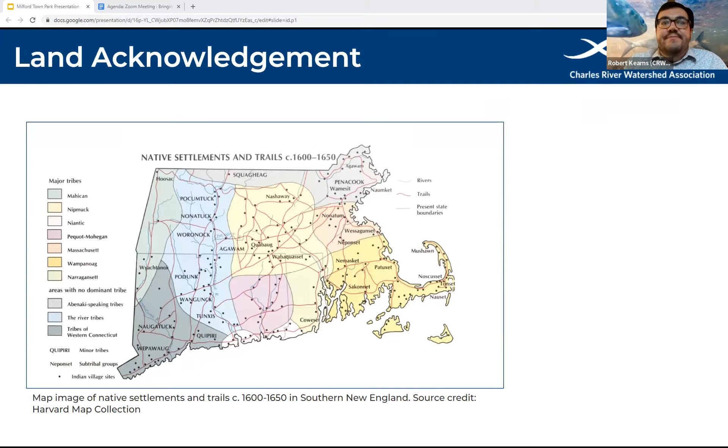Also, we're going to be seeing more dry periods - things will be flashy, then drier periods and droughts.

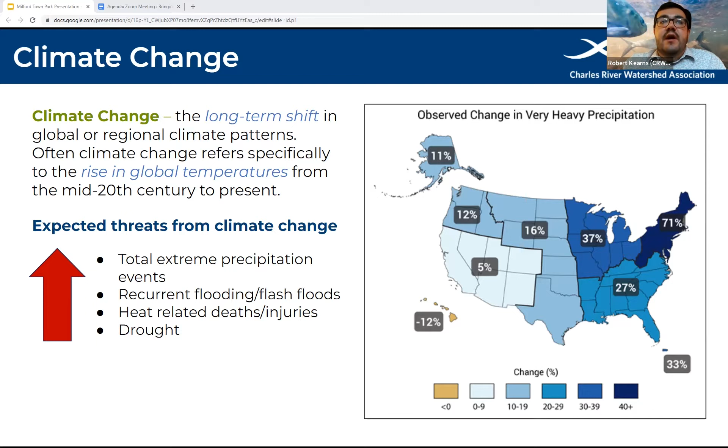When we think about climate change in our built environment, there are different areas in our watershed and communities where water acts differently. In undeveloped areas like forests, parks, and green spaces, we see more natural cycles in the water - more water able to get back into the ground and infiltrate, as well as get fed into the plants and trees.

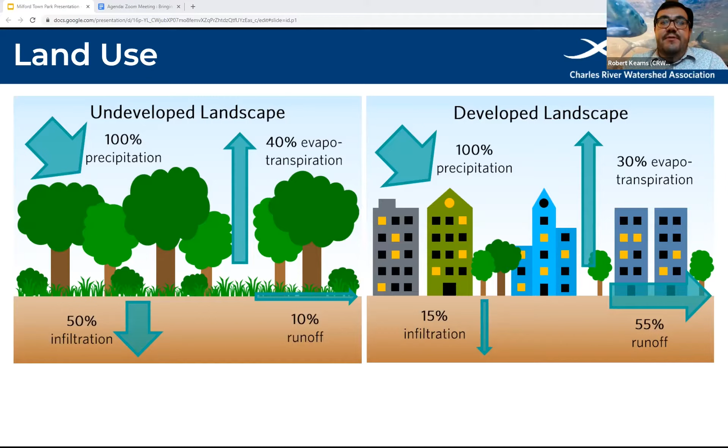In the developed landscape, we see a lot more runoff from impervious surfaces - your blacktop, your hard asphalt type surfaces. This creates a greater threat to our river and our communities from climate change, causing more flooding as well as more stormwater pollution, which I'll talk about in the next slide.

Also, with respect to development and redevelopment, we have opportunities to change conditions and improve water quality when we have the chance to do that work.

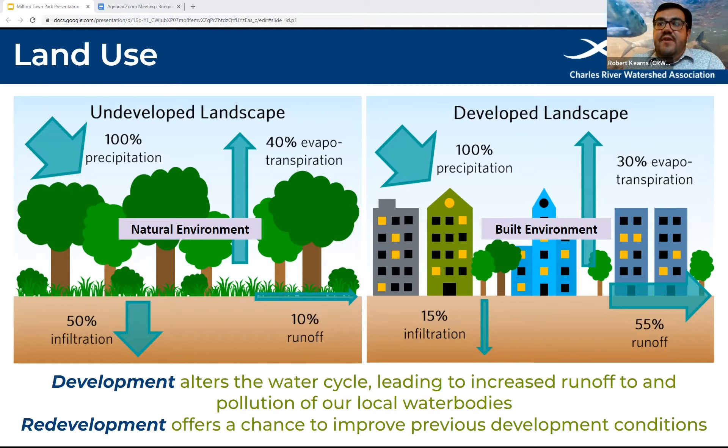When we think of stormwater runoff, anytime it rains, all of that water gets onto our roofs, sidewalks, and paved surfaces in our communities. All of the oil, all of the phosphorus that comes from fertilizers and from pollution in the air gets into our river through the drains in our streets, and impacts from leaves in the fall can also carry this stuff right into our river.

Oftentimes people think that the water going down the drains in the street gets treated like sewer water, but unfortunately it doesn't - it just goes directly into our water bodies.

Additionally, we're seeing the impacts on water quality in our river, specifically nutrient pollution from phosphorus and fertilizers, which is really impacting the water quality of the Charles River.

And when this stormwater gets into our water bodies, what we see is an abundance of cyanobacteria and other algal blooms. The cyanobacteria is one of the more concerning ones because it comes from all this excess nutrients, and it's really harmful to animals, plants, as well as humans if they get into contact with it a lot, especially small dogs.

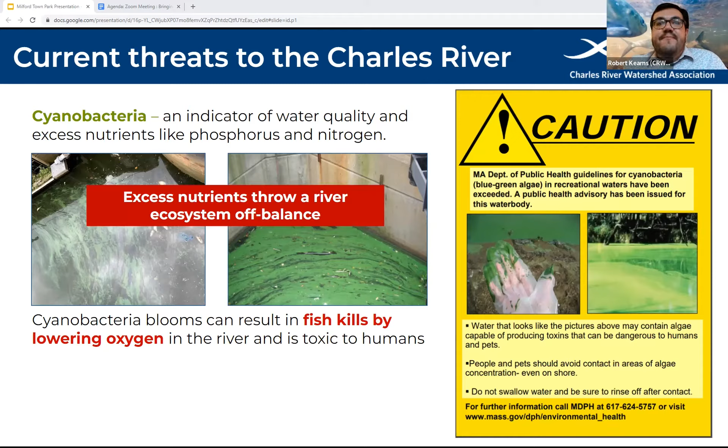So what are we doing about this? We are working on nature-based solutions. This is putting nature back into our communities, adding trees, wetland, soil, infiltration projects like the Milford project, which I'll talk about.

Oftentimes, when you think about climate change, you'll think about adaptation, resilience, and mitigation. When we're talking about this project, we're really talking about adaptation and resilience, building for the future of climate change, and making our communities more responsive to the threats and damages from climate change.

So when we think about stormwater and the drainage of our roads and sidewalks, and where all that water goes, there are two different categories: green infrastructure and gray infrastructure. Green infrastructure is the newer side of things, where we're bringing back nature into our neighborhoods, adding trees and rain gardens and other built things that help capture the water coming from the streets and sidewalks and pavement, and divert it to help it get cleaned and get back into the groundwater before it gets into our river.

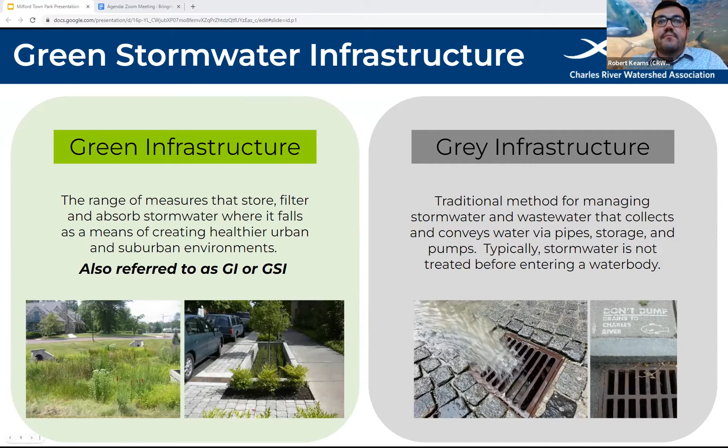There's a bunch of different types of green infrastructure practices: bioretention, permeable pavement, infiltration, as well as rainwater harvesting. All of these different things can be done as a combo platter, or combined, to help reduce pollution and reduce flooding. In the Milford project, we're doing two of them: bioretention, so we're doing rain gardens, as well as infiltration, which is the underground storage and basin system.

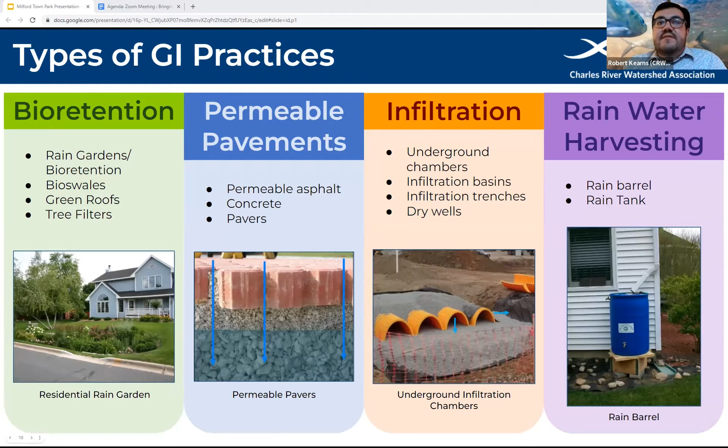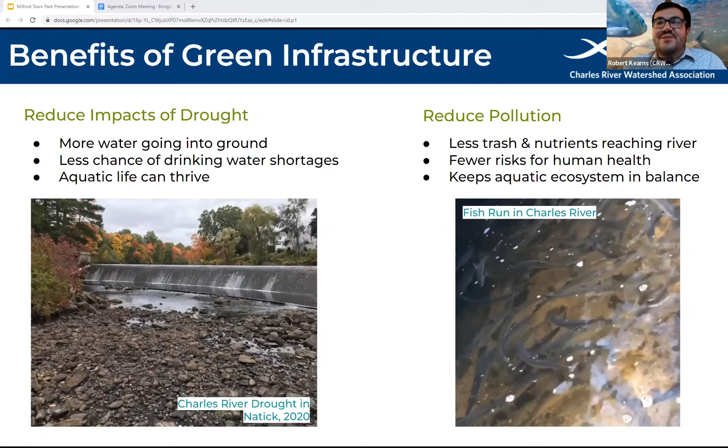The town of Milford has already started working on the stormwater in the community. For one, they've already built a stormwater wetland along the Charles River Trail by Louisa Lake. This is a wetland that CRWA wasn't a part of, but they used funding from the EPA 319 grant program, federal funding, to help build this wetland. It's just one of the demonstration projects that the town has done to help reduce the pollution.

From that, the town got really interested in working with CRWA, and we worked with them to do some planning before the Milford project, to look at all the water that drains into the Milford Pond of the Charles River. We did a subwatershed restoration plan, and we found favorable locations, prioritizing 5 places along this subwatershed area where all the water drains into the pond.

With the 5 priority sites, if they were to be implemented—and the Milford Town Park is the first one being done—we would reduce 300 pounds of phosphorus, as well as recharge 200 million gallons of groundwater back into the aquifer and into the ground. This was funded by Mass DEP's 604B grant program and the Milford Power Settlement. We have an informational video on our website, which I'll put in the chat.

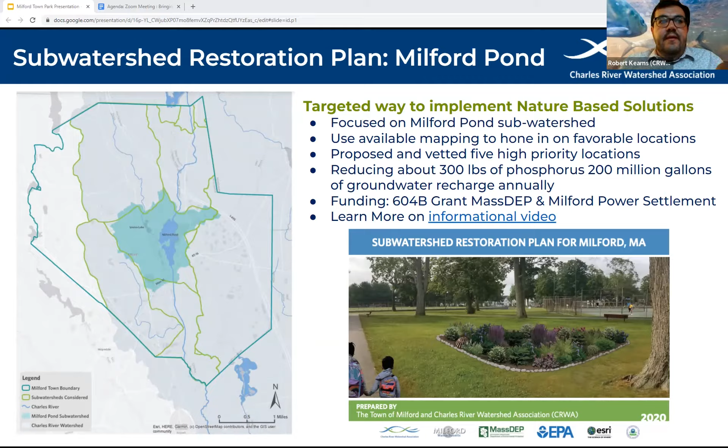From this project, we've come up with the Milford Town Park. This was the priority site from the feasibility study looking at the whole Milford Pond area. What we're doing currently in the park is three projects in one big project.

One thing that started last week is the town of Milford has started digging along the bandstand of the park, and they're going to be installing infiltration chambers to help take the water off of Walnut Street and Congress Street and all the sidewalks, bring it under the ground, store it there, and infiltrate it back into the ground.

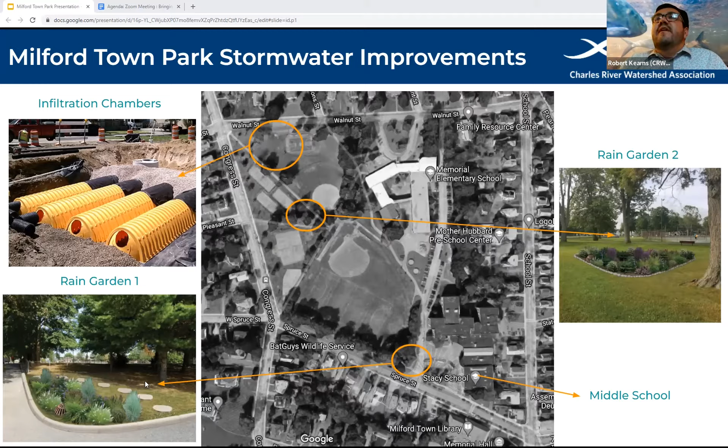Also, we're doing two rain gardens in the park, one at the corner by Stacy Middle School and one in the center of the park. These are two renderings of the park.

And this is just the renderings of the rain gardens close up. We have another rendering showing how the rain gardens work.

What happens is it'll collect the water from the streets and from the park, bring it into the area with the plants, collect the sediment and trash, help filter that, and filter it through the ground and through all the different layers of soil and stone, bringing it back into the ground.

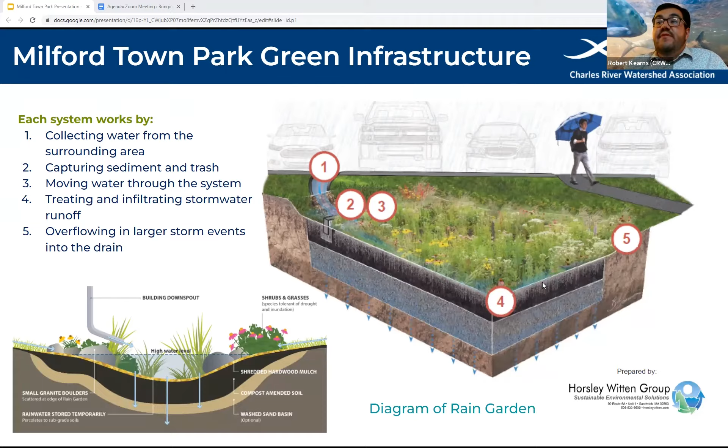There will also be an overflow for a large flood or event, so that'll go back into the stormwater, but filtered, with a lot of the pollutants taken out naturally through the plants and soils. Underneath the bandstand, which you can see here in this picture from a concert we tabled at, the town is currently building an underground storage and infiltration basin.

All the water, from Congress Street, Maple Street, is going to be brought in through pipes and put into this big chamber. It's like a big cavern underneath the ground with pipes and a bunch of crushed stone. It'll be stored here during a flood or when it rains, helping prevent flooding, but also slowly the water will be brought into the ground and recharge the groundwater.

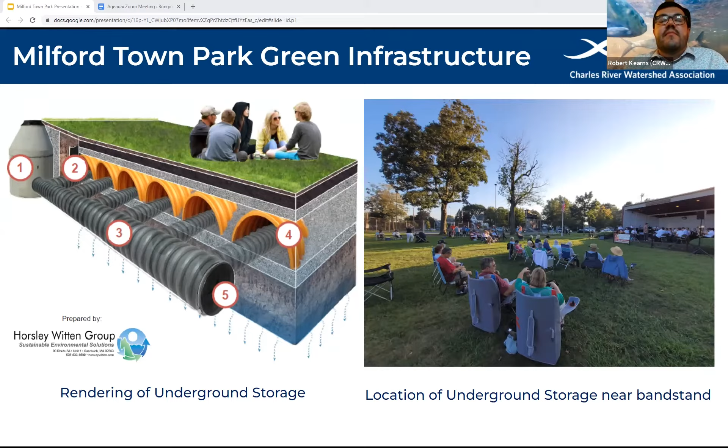Just some project stats: this project was funded by the Municipal Vulnerability Preparedness Program, or MVP, a state grant funding program for climate change. There's also funding from the Milford Power plant settlement that CRWA has leveraged, as well as some in-kind contributions from CRWA and the town.

Additionally, last year we finalized all the plans and got information from the community through a survey with over 133 respondents. And we're going to be looking right now, it's actively under construction.

We've done a lot of outreach, and we're also working with Milford TV to help promote it. We were on one of the shows, and this will be on, and we're going to get another show as the construction continues.

The benefits of this project are not only increasing climate change resilience through storage for flooding, but also reducing pollutants—it'll reduce 26 pounds of phosphorus annually, which will help the town comply with their stormwater permits through the MS4 system, which is great.

And every year it'll recharge 0.5 acre feet annually, which is like 55 concrete mixer trucks. Think about 55 concrete mixer trucks of water getting into the soil every year, which I think is really amazing.

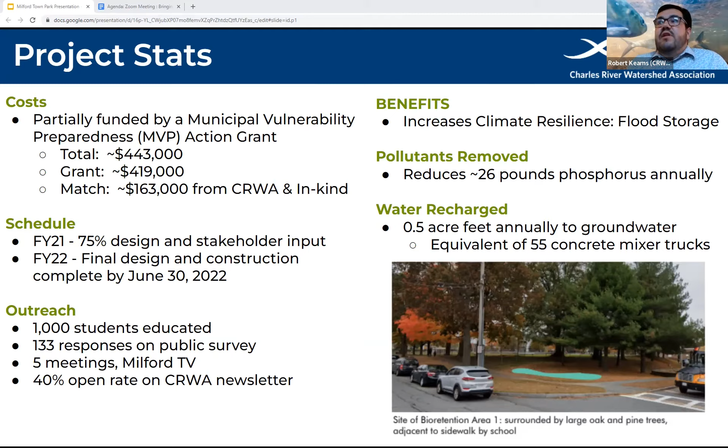Often people will ask, what's the story with maintenance for these structures? Every 10 to 20 years, there has to be maintenance to the subsurface soils.

Additionally, the plants were selected with the town and are tolerant to salting and de-icing, but also quarterly or yearly, the plants will have to be pruned and maintained, removing weeds and mulching.

And at least twice a year, the town is going to check in and look at debris and trash in the infiltration and in the rain gardens.

With the infiltration basin, because it's on the grassy area, mowing is just going to be normal, and it's built so that they can drive trucks over it for the different events. And then also sometimes they'll have to do some cleaning out with a vacuum underneath the surface.

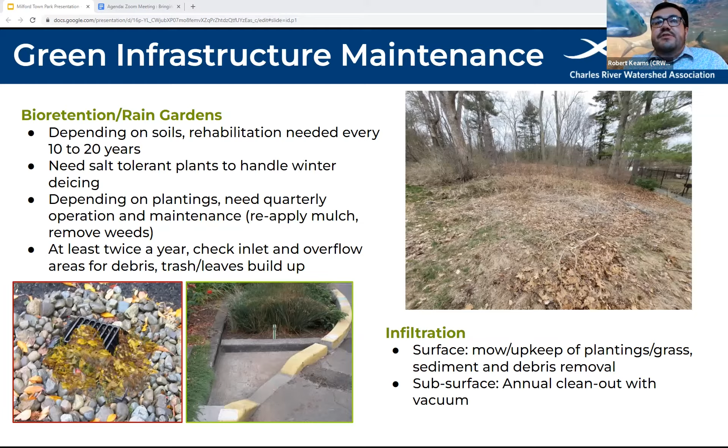So for outreach, we did a lot of different things. One of the fun things we did was all of the schools. This is from the Milford Town Library, but we did all the libraries in the schools. We put up different informational trifold information packets, but also bookmarks for the students and for all citizens and residents in Milford to look at how does this project help beautify the park, but also how does it help clean up the river? So we have little cute bookmark cards that Julia made.

Also, we did the survey and we put that out, and we got information from what type of plants people were interested in, including, and we helped bring that into the design. And we had over 120 respondents in English, Spanish, and Portuguese.

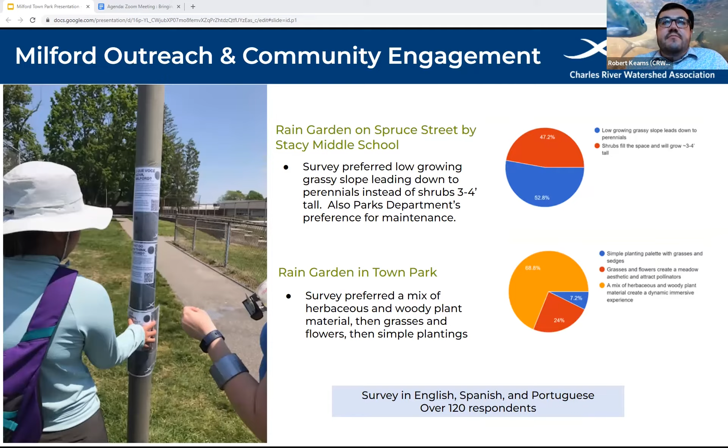Also, we did a lot of other cool things, like we met with the select board and other town committees. We went to the Milford Cultural Council. We went and spoke to folks at different boards and committees. I think, and also we met with folks at the senior center.

And unfortunately, we don't have a picture, but we had a really good conversation, myself and my colleague Jenny Moonen, who's no longer with CRWA, but we had a great conversation with the Milford Senior Center Men's Club, and we really engaged them in person on climate change, but also specifically the Milford project.

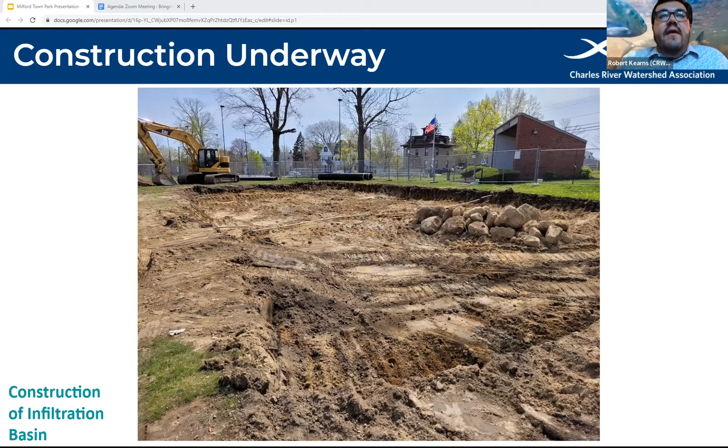And this is just another view looking at the infiltration basin that's under construction currently, right by the bandstand.

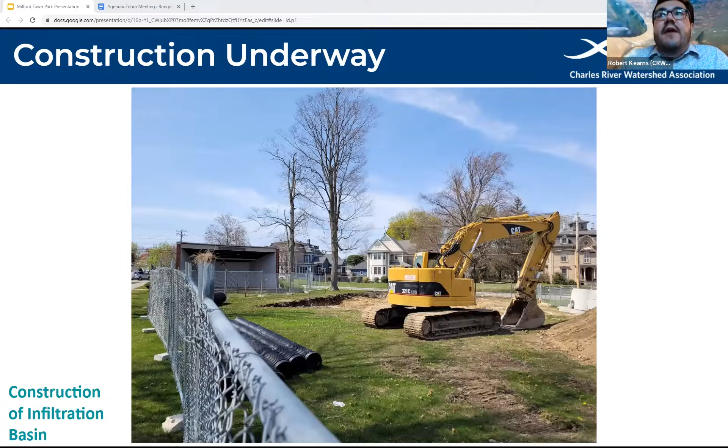Also, currently we're not finished, but we're doing an educational film and video that we're working on to help educate folks about the project, but also about stormwater in the Charles River.

And just to conclude, I want to say thank you to a lot of our supporters and folks on the project team: Hillary King, who's the Central MVP Regional Coordinator, the entire MVP team, Mike Dean, who's a town engineer, Scott Crucifali, who's a Milford Highway Surveyor, and his team who's building the underground basin, as you see on the picture below, and Jim Azam, who's the Milford Parks and Recreational Administrator, head of the Parks Department, who's done an awesome job, not only working on this project, but also doing things in the park.

And the other interesting thing about Jim, I don't know if he's still on the call, but he's the tree warden in town, and Milford is a Tree City USA. We did have to remove 1 or 2 of the trees that were in bad health, but we're planting some new trees by the rain gardens, which I'm very excited about. Jim has a whole plan for adding trees and really making sure that the tree canopy in Milford is more robust and helps reduce the urban heat island.

And finally, also thanks to Steve Stanish, who's our engineer at Horsley Witten Group, who helped design the project. So I'm going to conclude there.

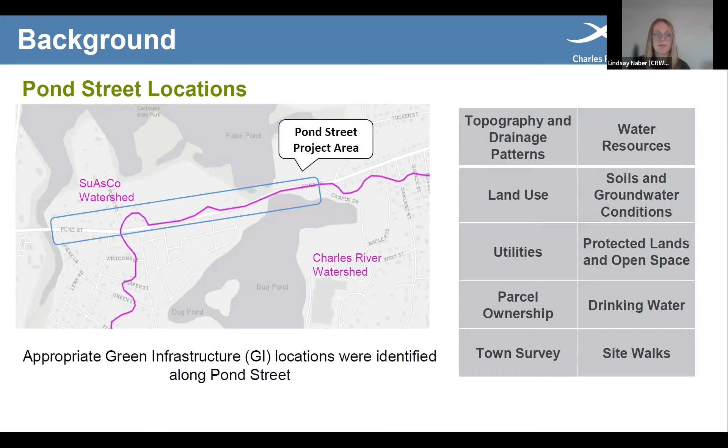Robert already touched upon this, but the two types of green infrastructure that we considered were appropriate for this area were bioretention and infiltration.

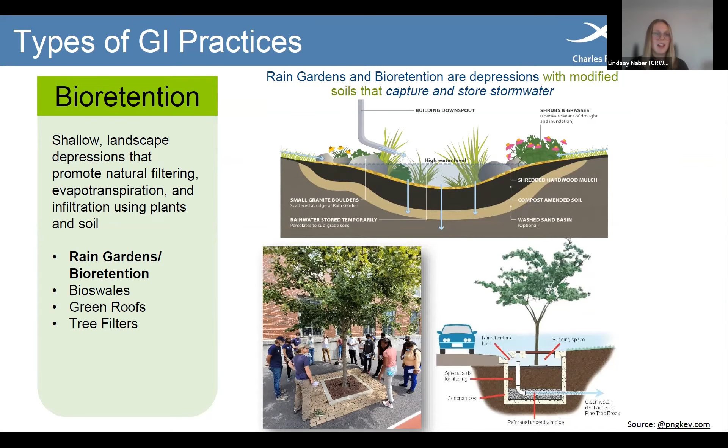The other green infrastructure solution we looked at for this project was infiltration. Robert also touched on this, but these are underground storage facilities with stone bedding, and they similarly help reduce pollutants and offer temporary storage for stormwater.

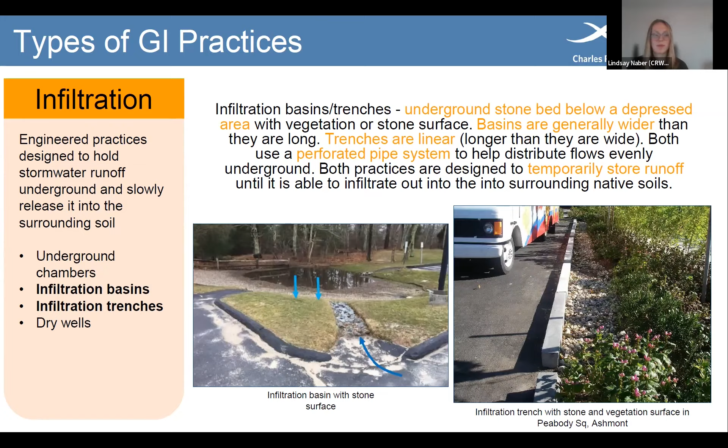This slide and the following two slides show where the final 8 different proposed green infrastructure designs are for this project. You can see they're a mix of infiltration trenches and bioretention areas, based on land use and all the other categories mentioned earlier.

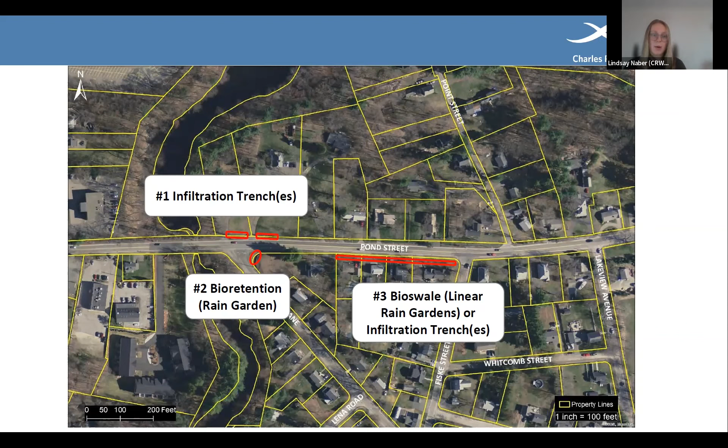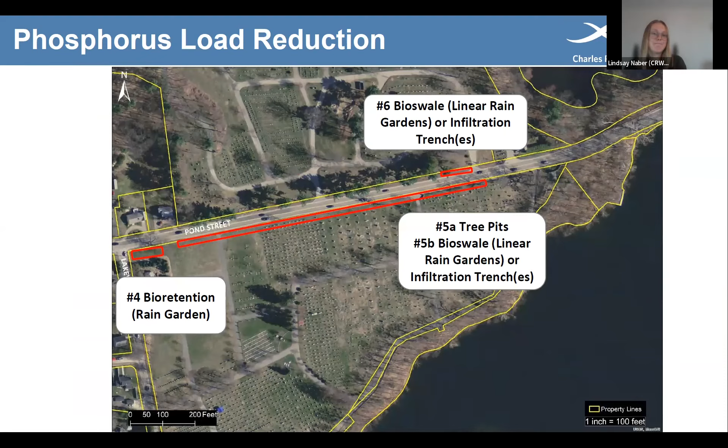This is on the westernmost side of Pond Street. As I go through the slides, this one is in the middle of our project area—you can see more bioretention. Bioswales is just another word for rain gardens. This is the easternmost side of Pond Street, and these are the final 2 locations we proposed for green infrastructure solutions.

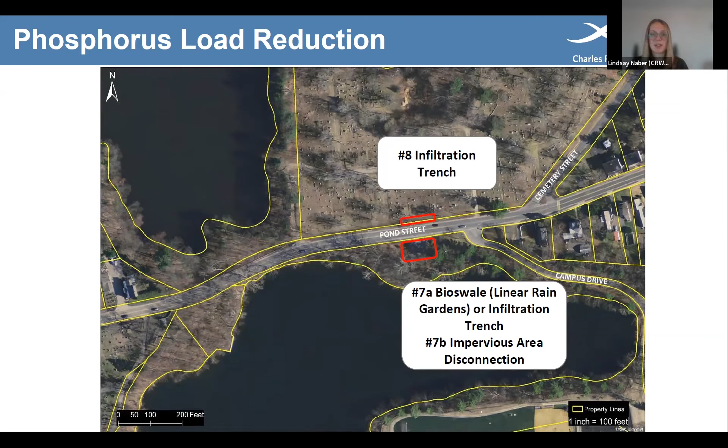To put that number into perspective, Natick is required through the MS4 permit to reduce its phosphorus load every year, and right now Natick has to reduce its phosphorus load by around 1,000 pounds per year. So these are pretty small systems, but as a first pilot project, it's definitely a good start.

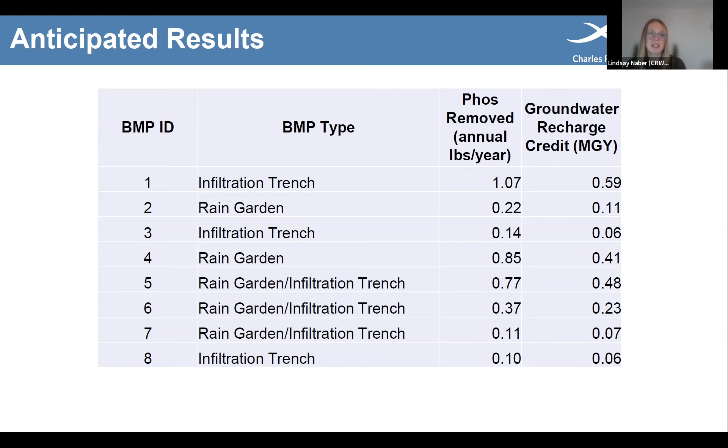Additionally, next Saturday, May 21st, between 9 and noon, there's the Natick Touch a Truck Day with the DPW. If you want to hear more about the project then, I'll be there talking about this some more with different people. So if you have any interest, I'd be happy to share that information along to you.